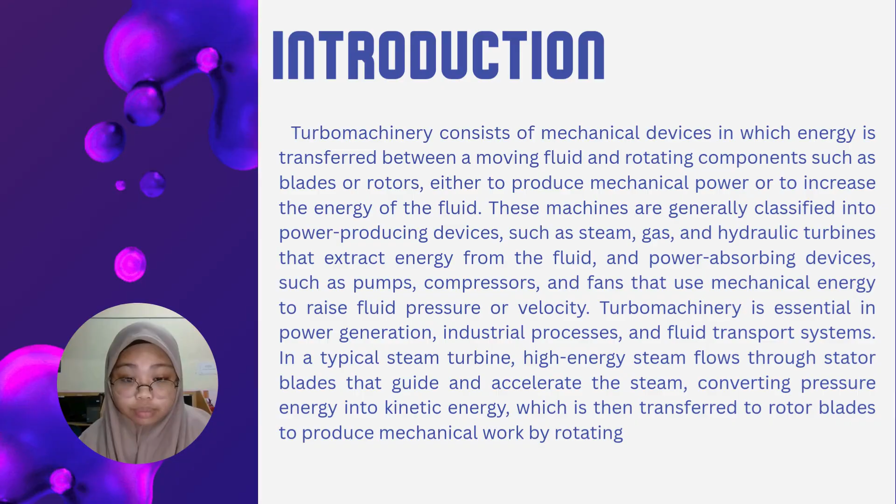Turbomachinery is essential in power generation, industrial processes, and fluid transport systems. In a typical steam turbine, high energy steam flows through the stator blades, which guide and accelerate the steam, converting pressure energy to kinetic energy, which is transferred to rotor blades to produce mechanical work by rotating.

Next, for the background, turbomachinery is a rotating fluid machine where energy is transferred between a fluid and a rotor or impeller. Its operation is based on conservation of mass, energy and angular momentum. It's classified into power producing machines such as steam, gas, and hydraulic turbines, and power absorbing machines such as pumps, compressors, and fans. The power producing machine extracts energy from the fluid to produce mechanical shaft work. The power absorbing machine requires a mechanical input to increase fluid pressure or energy.

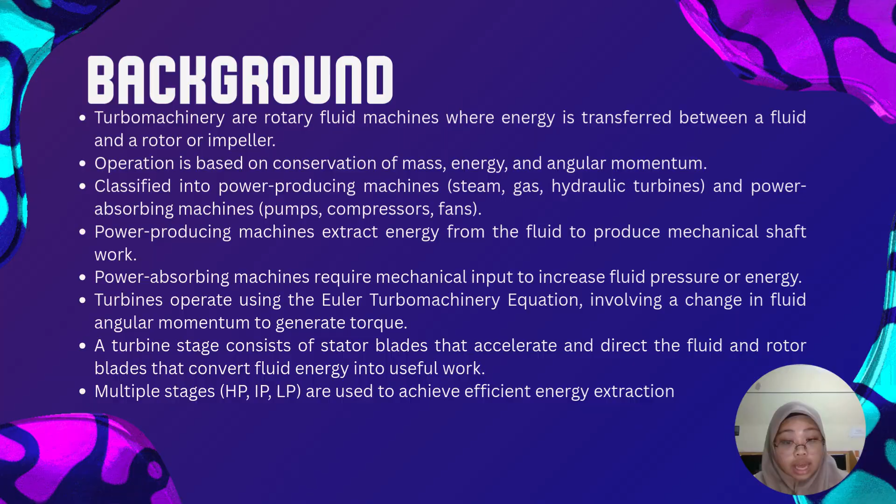Next, the turbine operates using the Euler turbomachinery equation, involving a change of fluid angular momentum to generate torque. Then, a turbine stage consists of stator blades that accelerate and direct the fluid and rotor blades that convert fluid energy into useful work. Lastly, for multi-stage, high pressure, intermediate pressure, and low pressure stages are used to achieve efficient energy extraction.

Bismillahirrahmanirrahim. So my part is the design specification. The centrifugal pump is designed to transport 0.65 cubic meters per second of river water to a tank which is 20 meters above, through a 0.3 meter, 35 meter pipeline. A mixed flow single stage pump with a closed backward inclined impeller was selected to handle the high flow rate efficiently while maintaining stable performance.

For the impeller geometry, the inlet blade angle is 35 degrees and the outlet is 60 degrees. Inlet radius is 90 millimeters and outlet radius is 100 millimeters. The blade width is 40 and 50 millimeters, and a speed of 3500 rotations per minute was optimized within project constraints to generate the required total dynamic head, which is 31.1 meters.

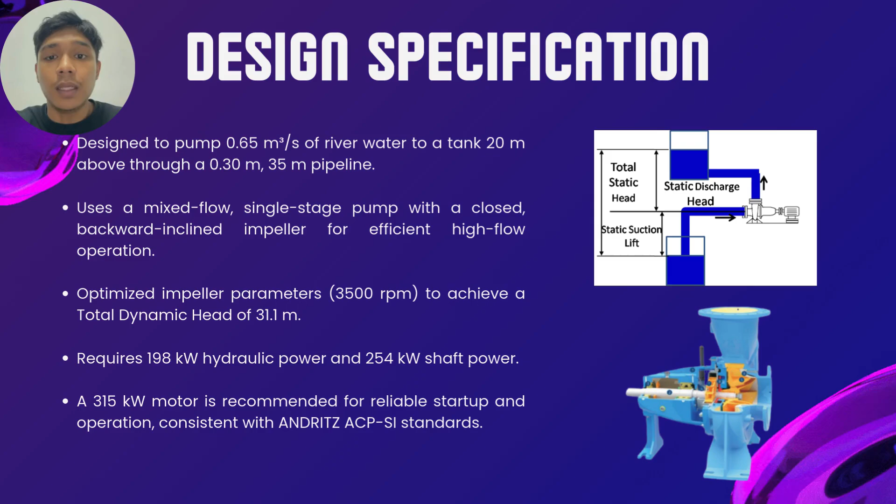The pump requires 198 kilowatts hydraulic power and 254 kilowatts shaft power, with a 315 kilowatt motor recommended for startup margin and reliable operation, aligning the design with industrial standards like the Andritz ACP-SI.

Assalamualaikum warahmatullahi wabarakatuh. My name is Muhammad Amir Rais bin Sharan, and now I'm going to continue our presentation for week 2, the design analysis. For the analysis, the first one is pipe flow velocity. With a 0.3 diameter at flow rate 0.65, our flow velocity is 9.2. This high velocity means significant friction losses that must be considered in the head calculation.

Then we continue with friction and minor losses. The friction loss is 6.8 meters, using the Darcy formula or the figure, we have f equal to 0.018, and our minor loss is 4.3 due to fittings, bends, valves, entrance and others. Combining these losses, we get 35% of total energy demand.

Then we go for total dynamic head, where the static head plus friction plus minor loss equals 31.1 meters. Then we move to hydraulic and shaft power. We assume the hydraulic power is 198 kilowatts. Assuming the efficiency is 78%, we have a shaft power of 254 kilowatts. So we need to select a motor of 315 kilowatts for safety margin, startup torque, and reliable operation.

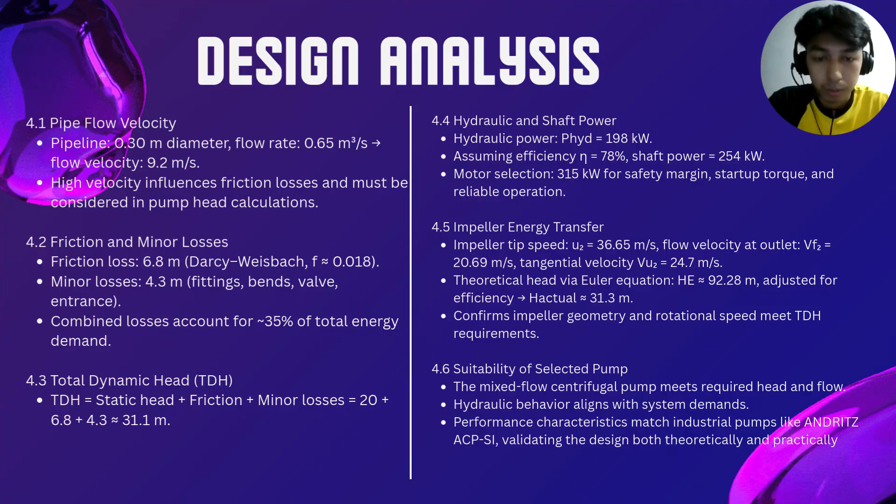This shows the suitability of the pump as a mixed-flow centrifugal pump for the required head and flow. The hydraulic behavior aligns with system demand and the performance characteristics match industrial pumps like ACP-SI, validating this design both theoretically and practically. Thank you.

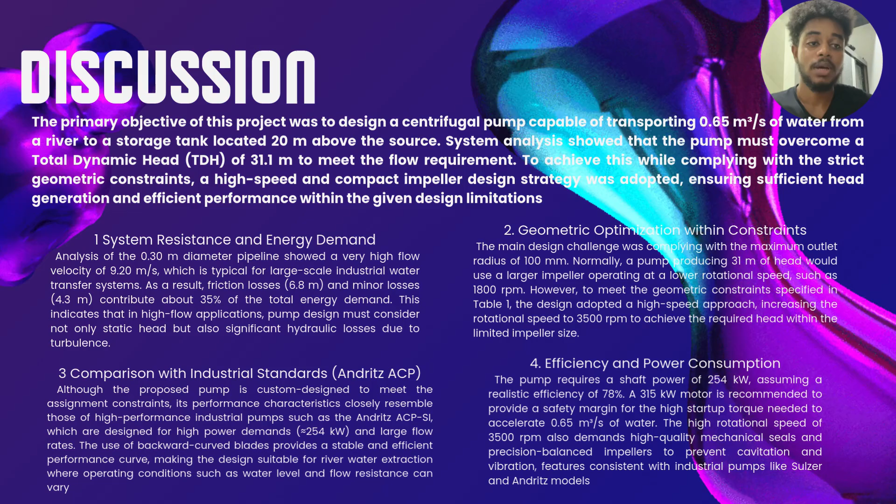So first, system resistance and energy demand. We looked at the pipe, which has a diameter of 0.3 meters. The water flows very fast, about 9.2 meters per second, which is normal for large water systems. Friction and other minor losses are about 35% of the total energy needed. This shows that when designing a pump for high flow, we must consider not just the height it needs to lift water, but also the energy lost to friction and turbulence.

Second, geometric optimization. One big challenge was the maximum outlet radius of 100 millimeters. Usually, a pump that lifts 31 meters would use a bigger impeller and a slower speed, like 1800 RPM. But because of our size limits, we used a smaller impeller and increased the speed to 3500 RPM. This way, we still reach the needed head without exceeding the size constraints.

Third, comparison with industrial pumps. Even though this pump is custom made for our project, its performance is similar to high performance industrial pumps like the Andritz ACP-SI. Those pumps have high power, around 254 kilowatts, and large water flow, using a backward curved blade that gives stable and effective performance, which is important for river water pumping because water level and resistance can change.

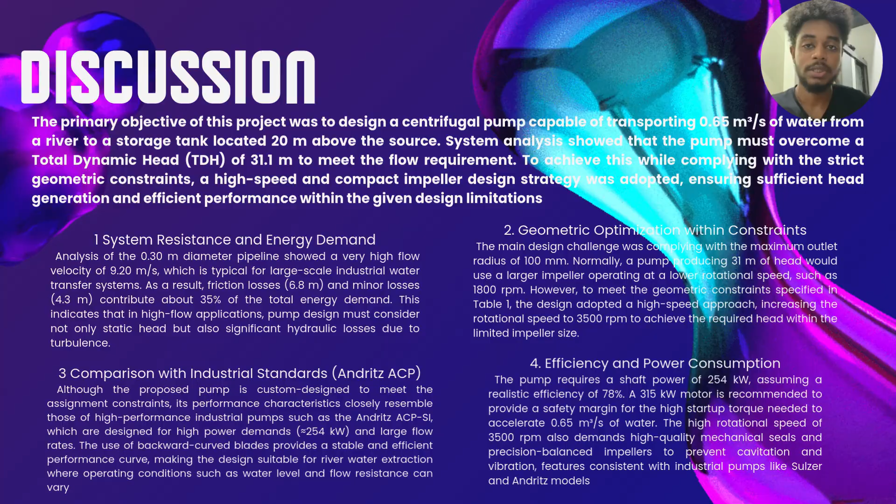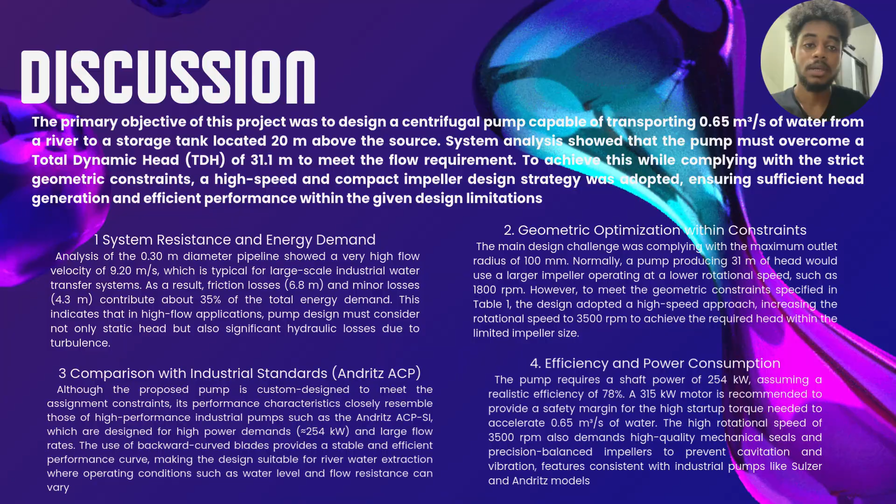So fourth, efficiency and power. The pump needs about, as we said, 254 kilowatts of shaft power, assuming 78% efficiency. We recommend a 315 kilowatt motor to handle the extra power needed at startup for the high water flow.

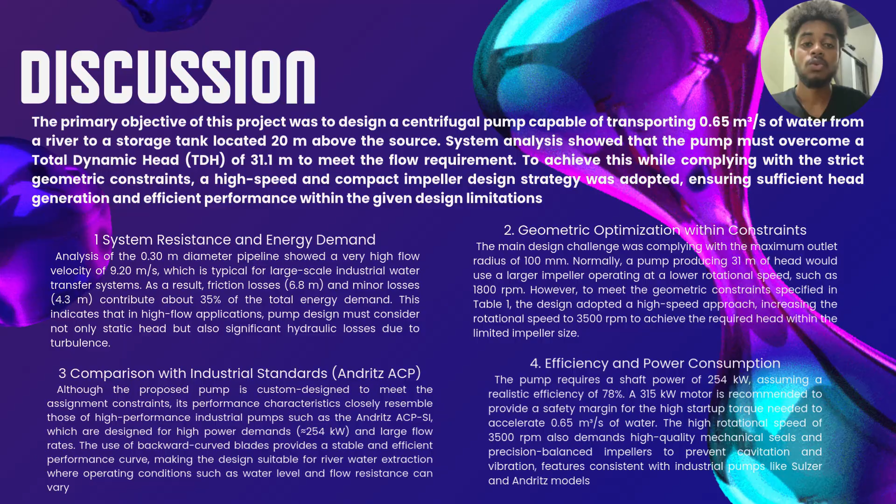The high speed of 3500 rpm means we also need strong seals and precisely balanced impellers to prevent vibration or cavitation. These features are common in industrial pumps like Sulzer and Andritz models. Thank you.

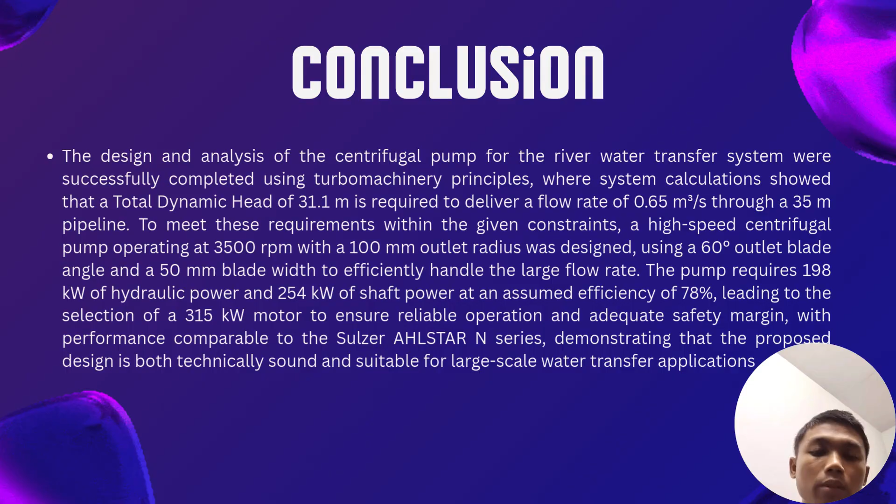Okay, for the conclusion, a centrifugal pump for river water transfer was successfully designed using turbomachinery principles. The system delivers a flow rate of 0.65 cubic meters per second at a total dynamic head of 31.1 meters, operating at 3,500 revolutions per minute with high efficiency. This power analysis led to the selection of a 315 kilowatt motor, confirming that the design is technically sound and suitable for large-scale water transfer applications.